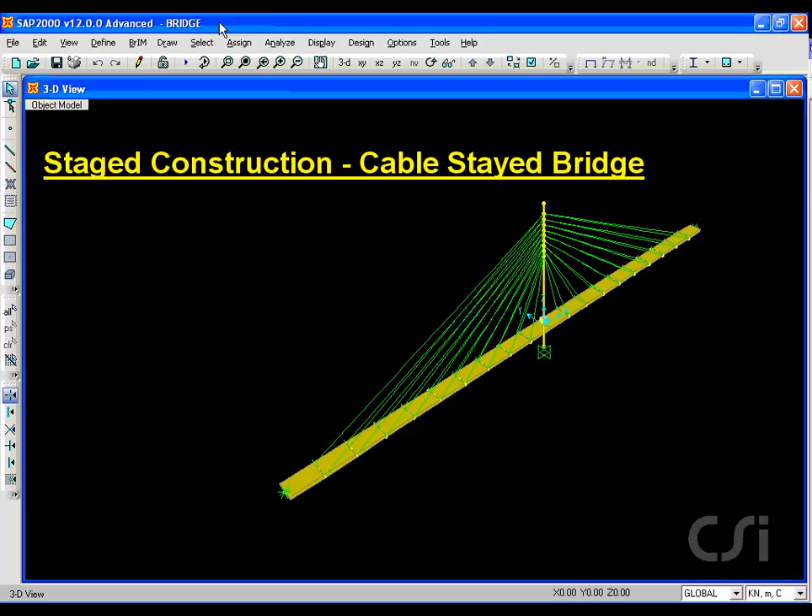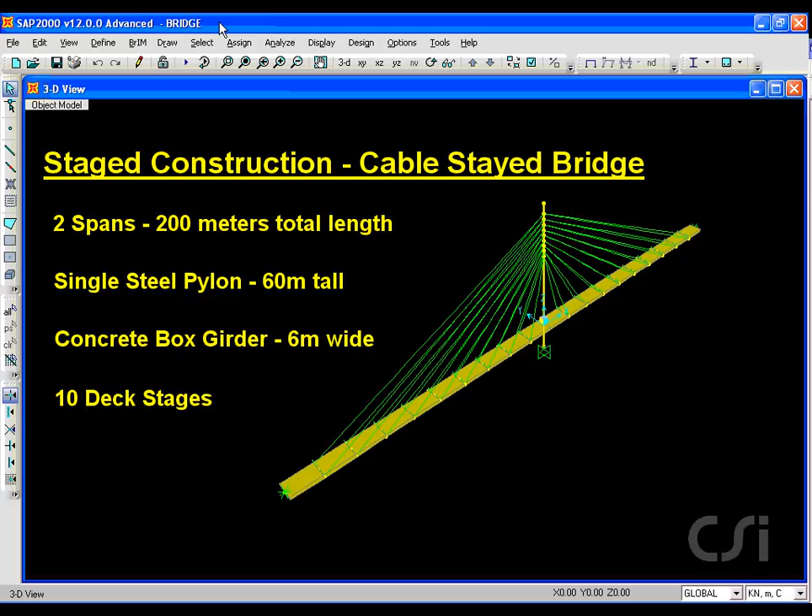This tutorial will show how to use SAP 2000 to model staged construction of a cable-stayed bridge using the Construction Scheduler feature. It will have two spans, each 100 meters in length, with a single steel pylon 60 meters tall. The deck will be a concrete box section, 6 meters wide, and will be constructed in 10 stages.

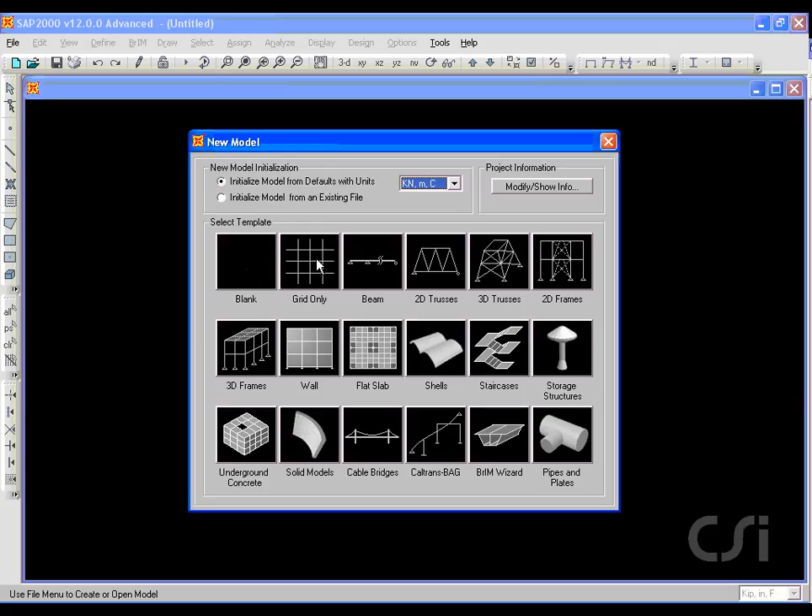We start the process by clicking on File, New Model, and selecting the units as kilonewton meters. We will construct the model using only grids, so click on the Grid Only button. We will have a total of 3 grid lines in each direction.

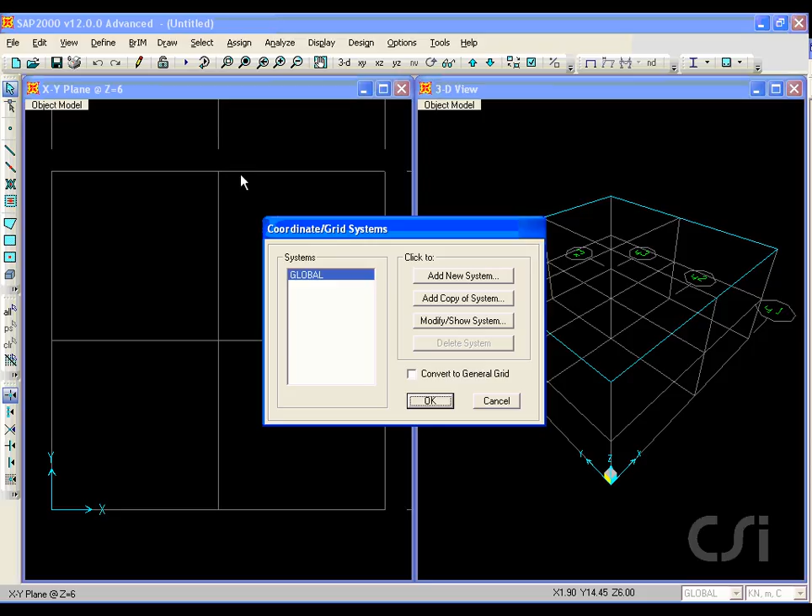Click on the Define Coordinate Systems Grids command, and then the Modify Show button to bring up the Define Grid System data form. For the X direction, which is along the span, our coordinates will be -100, 0, and +100. In the Y direction, which is across the deck width, we will enter -3, 3, and 0. In the Z direction, which is vertical, we enter -10, 0, and 50.

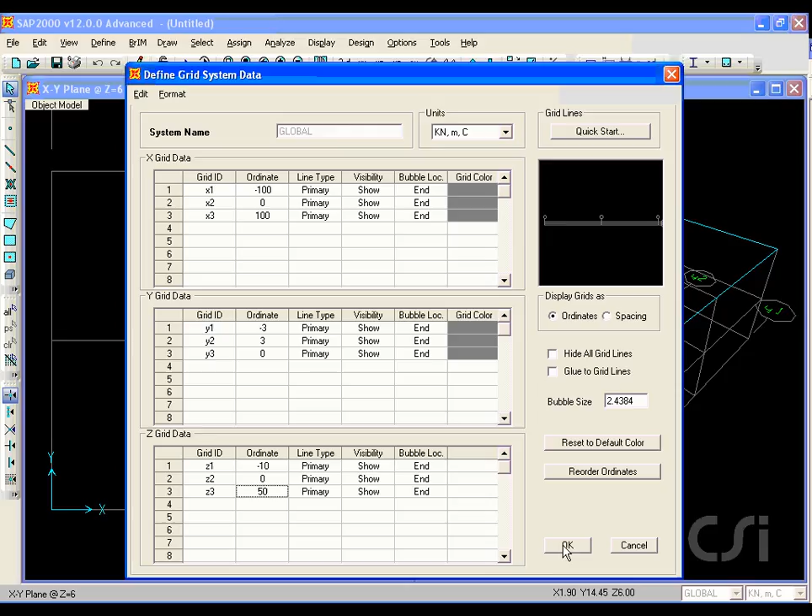We will work in only one window, so close the Plan window and then go to the Define Section Properties Frame Sections command. Here we will add pipe sections to define a non-prismatic pylon. Make sure that the frame section property type is set to steel and click the Pipe button. We start with the bottom section and enter 1.2 meters for the diameter and 0.05 for the thickness.

We will add another pipe section to model the pylon at the top. Here it has a diameter of 0.6 meters and then again a thickness of 0.05.

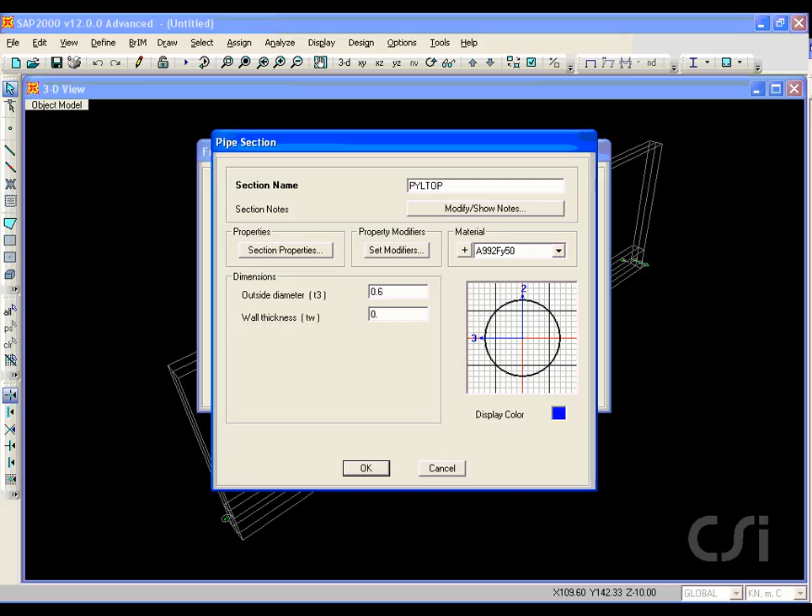Next, we take the previously defined sections and create a non-prismatic section. Select Other from the frame section property type and click the non-prismatic button. We will call it Pylon and use the top section as the start section and the bottom section as the end. It will be varied over the entire length in a cubic variation.

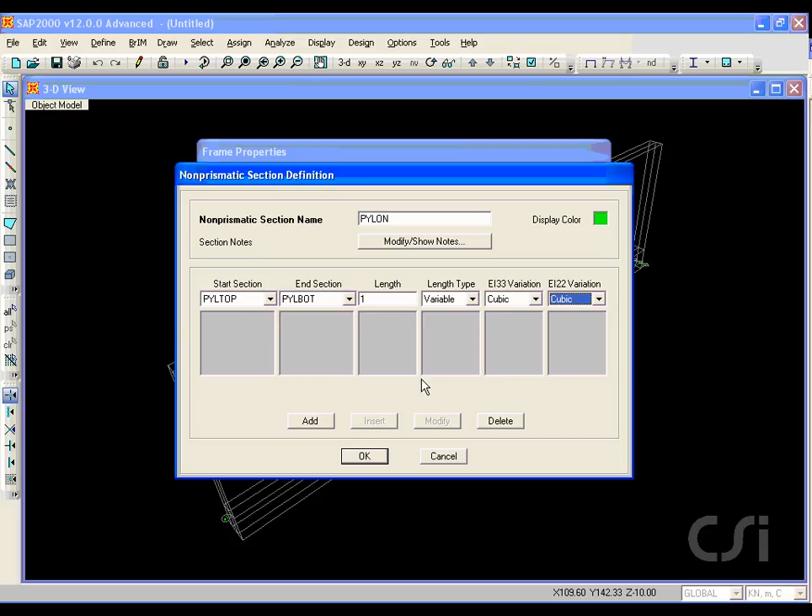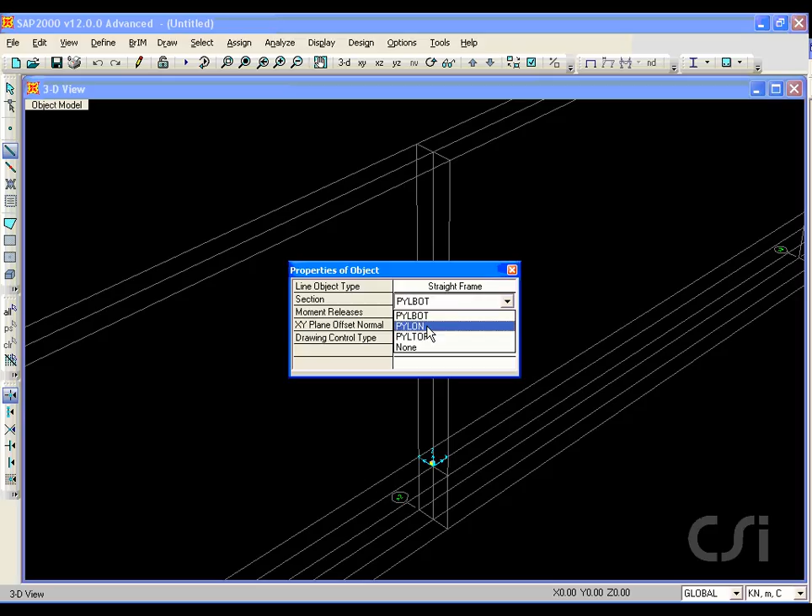Next, we zoom in on the pylon location and draw the pylon object, starting at the top and going to the bottom to match our member definition. We leave the Draw mode and shut off the grids under the View menu.

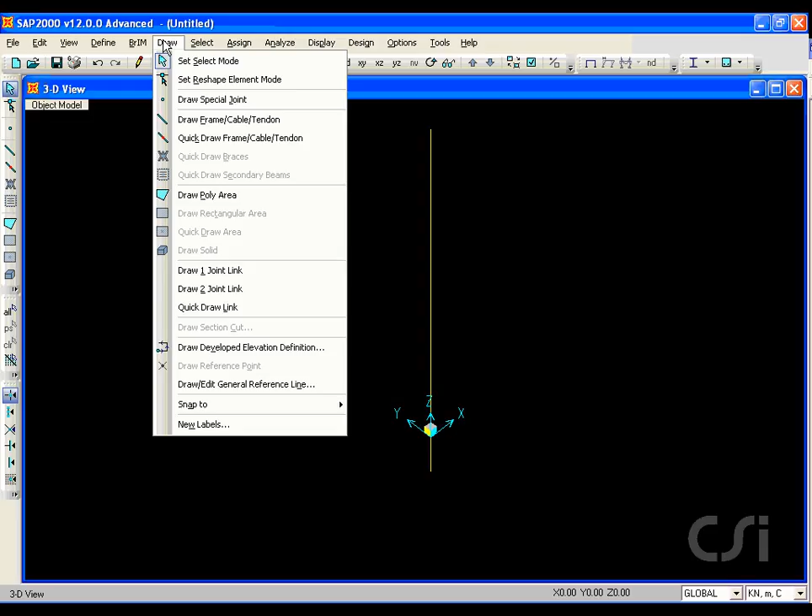Next, we will draw joints to model the saddle locations for the cables. The first joint will be 4 meters below the top of the pylon. By clicking on the top of the pylon with the offset set to -4 meters, a joint is added.

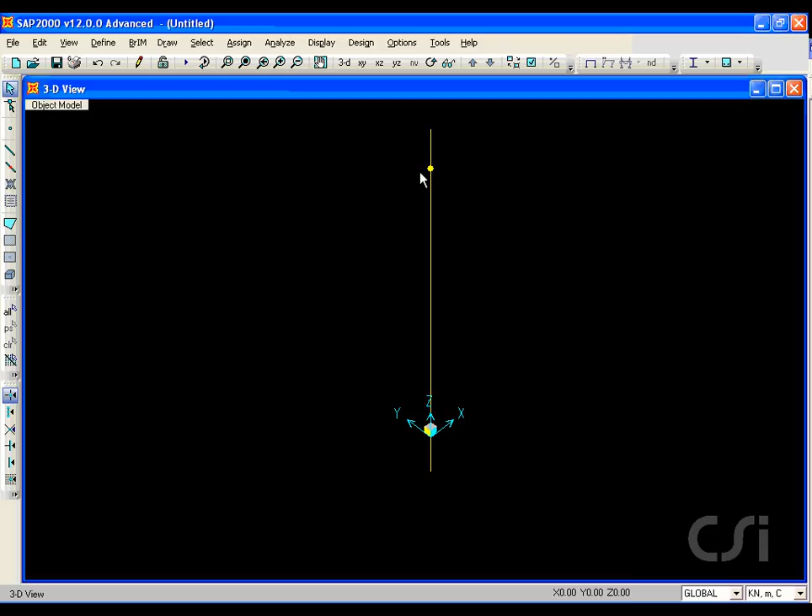We leave the Draw menu, select the joint just drawn, and go to the Edit Replicate command. Here, we will add additional joints for the saddles at 2-meter intervals below the selected joint. This gives us a total of 9 cable to pylon connections.

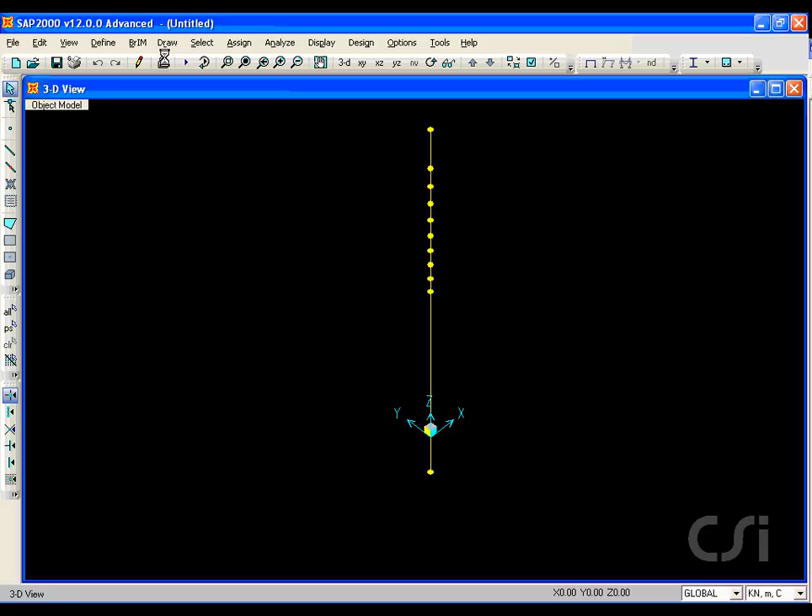Next, we will modify the concrete material property to include time-dependent properties. Make sure that 4000 psi is selected, which is our concrete material, and click the Modify Show button. Check the Switch to Advanced Property display box, and then the Modify Show Material Properties button. Lastly, click the Time-Dependent Properties button.

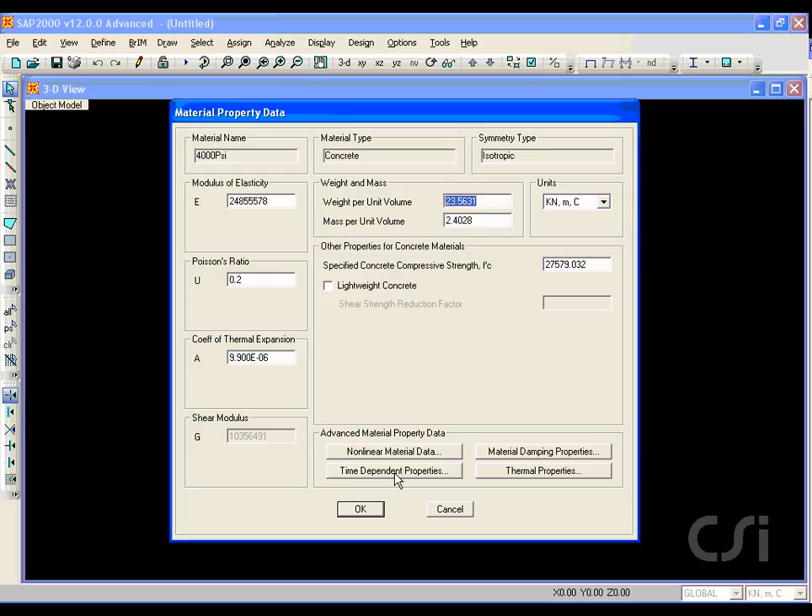In this model, we will include both creep and shrinkage effects. We will set the shrinkage start age to be 3 days, and we'll use the full integration creep analysis type.

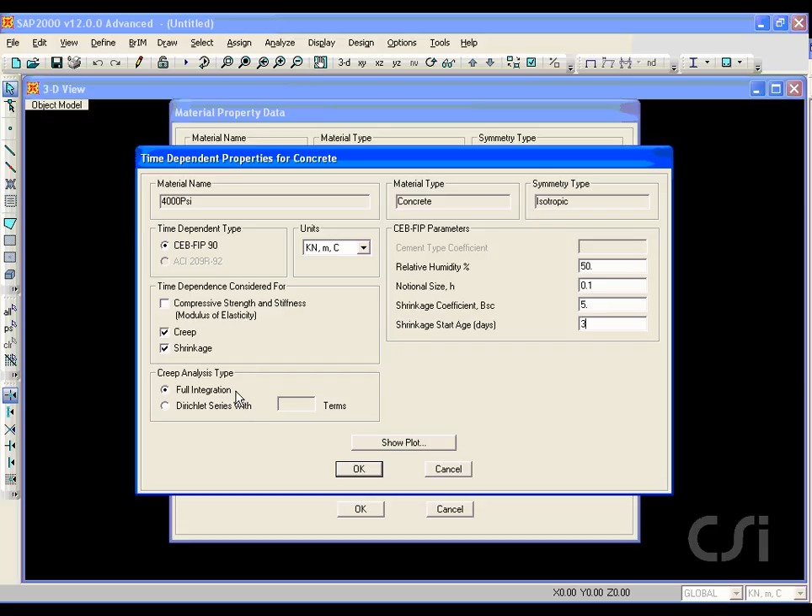Next, we will define the concrete box girder to be used for the deck. Select the material to be concrete and click on the Tube button. Input a depth of 1.2 meters, a width of 6 meters, a flange thickness of 0.2, and a web thickness of 0.3.

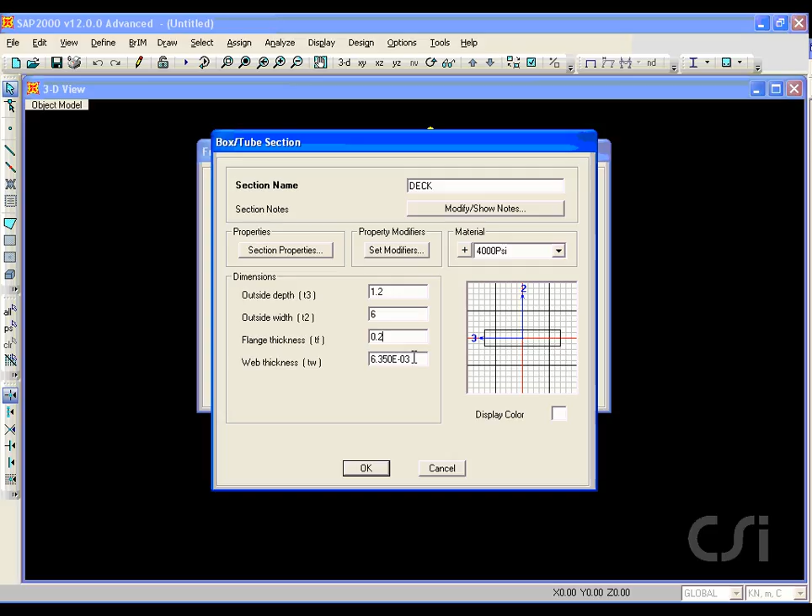Toggle the grids back on and switch to an XY plan view, and toggle down to the Z equals 0 level, which is the elevation of the deck. We will draw the deck as a single object from the pylon out to the right end.

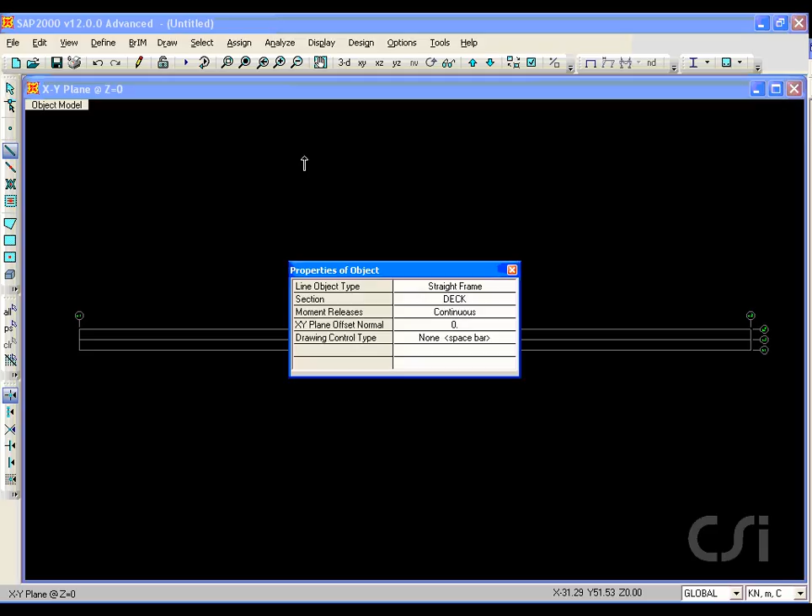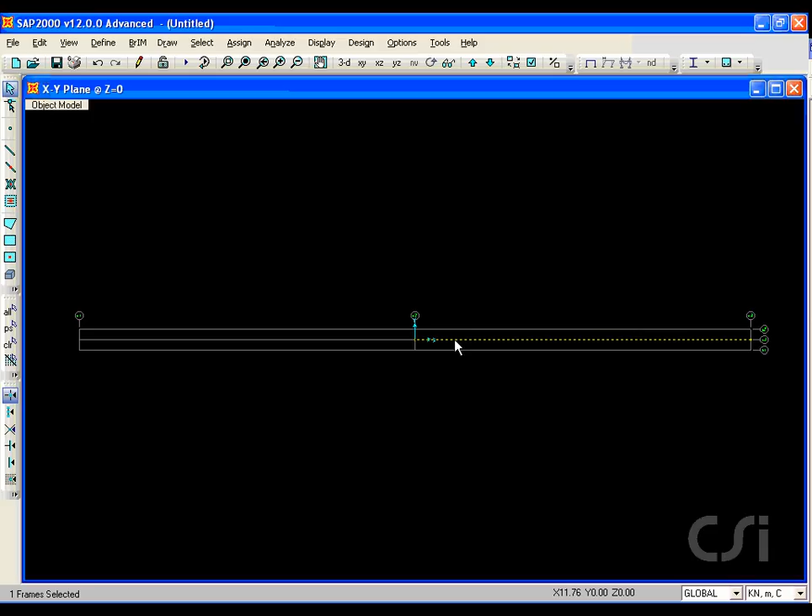Click on the Select Mode button and select the frame object just drawn. Go to the Edit, Edit Lines, Divide Frames command and enter 10 to divide the deck into 10 segments.

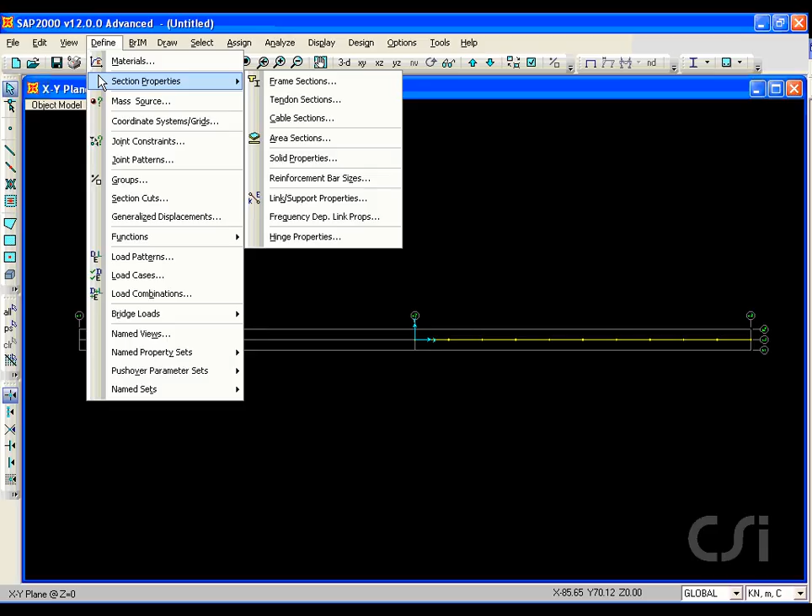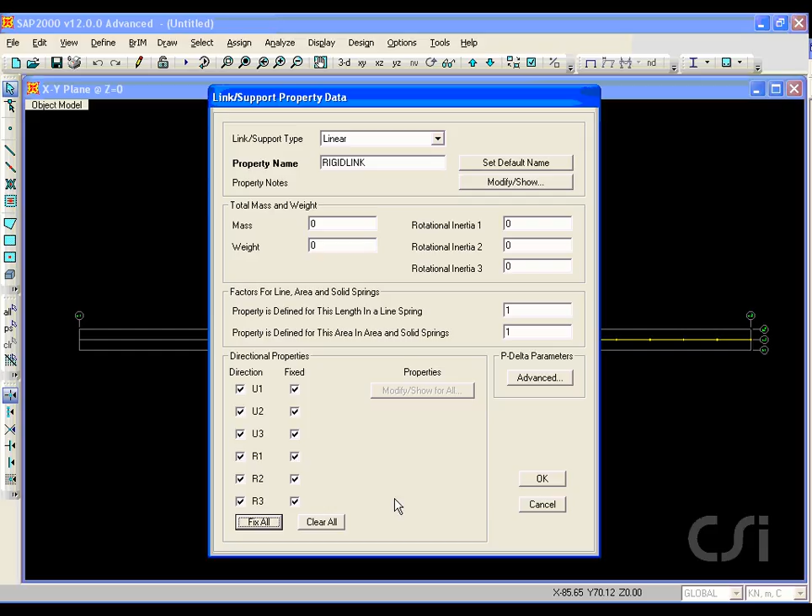Next, we will define rigid links that span from the deck centerline to the deck edge where the cables connect. Click on the Fix All button to restrict any relative deformation. Before we draw the links, we will turn on the Snap to Lines option, and we'll window in for a better view.

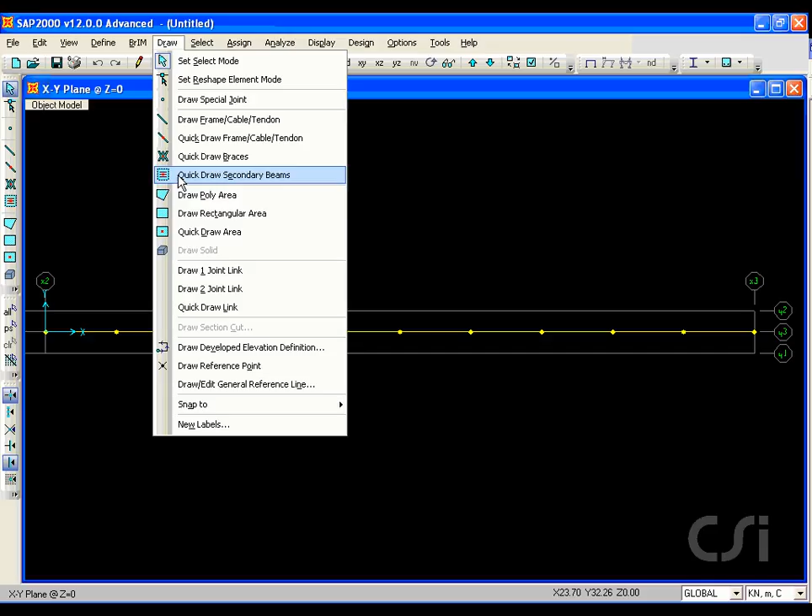Click on the Draw 2 Joint Link command, and make sure that rigid link is showing in the property box. Click on the first joint to the right of the origin, select Vertical from the Drawing Control box, and click on the top grid line to draw one link. Right-click the mouse to stop drawing, and repeat the process for the rigid link on the other side of the deck.

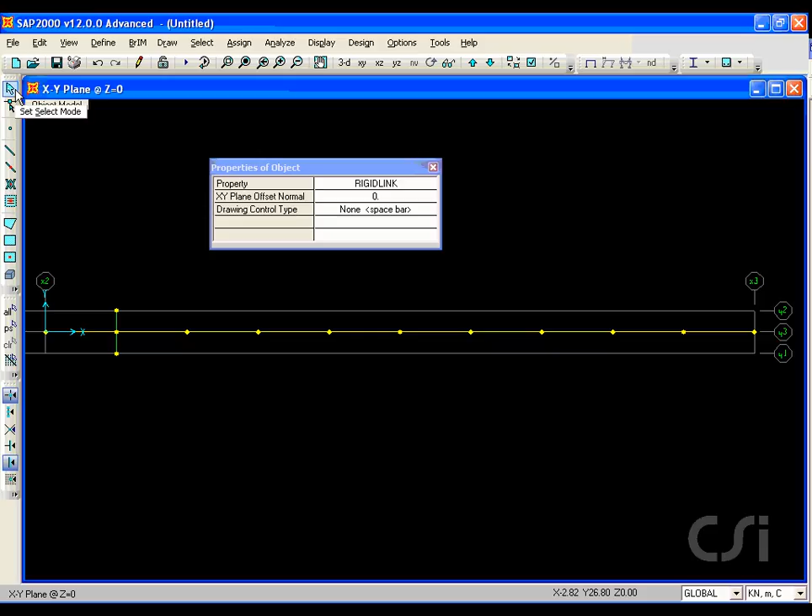Zoom in even closer and select the two rigid links just drawn and go to the Edit Replicate command, and add links at 10 meters on center.

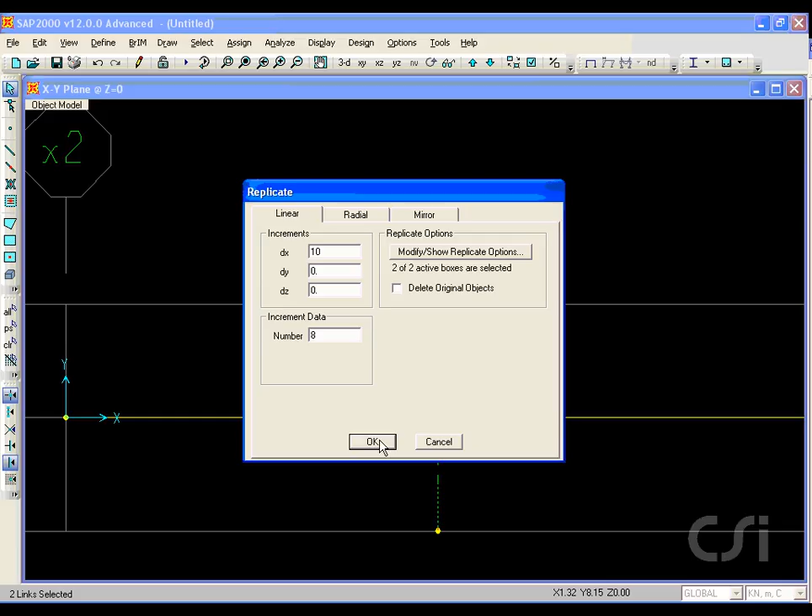Isolating our view on the right side of the bridge. Next, we will define the cable sections. Go to Define Cable Sections and add a new section. We will define the properties by using a diameter of 0.04 meters.

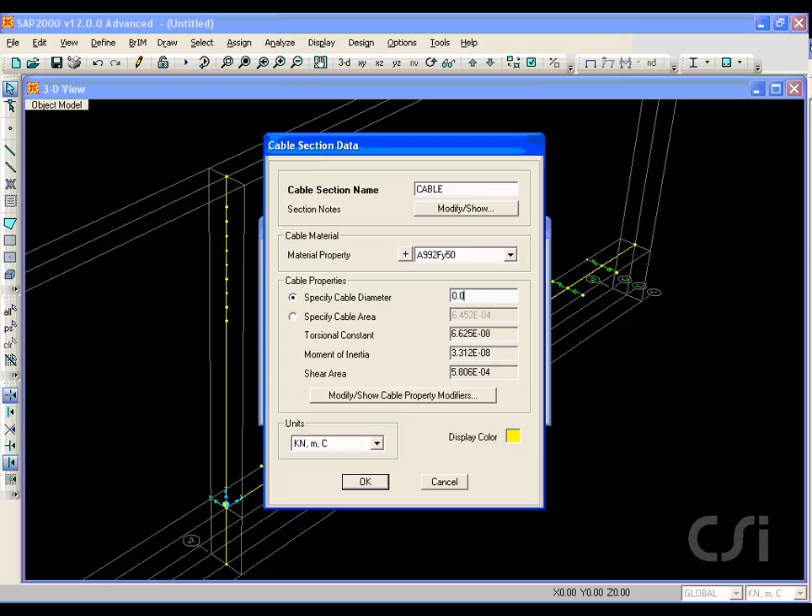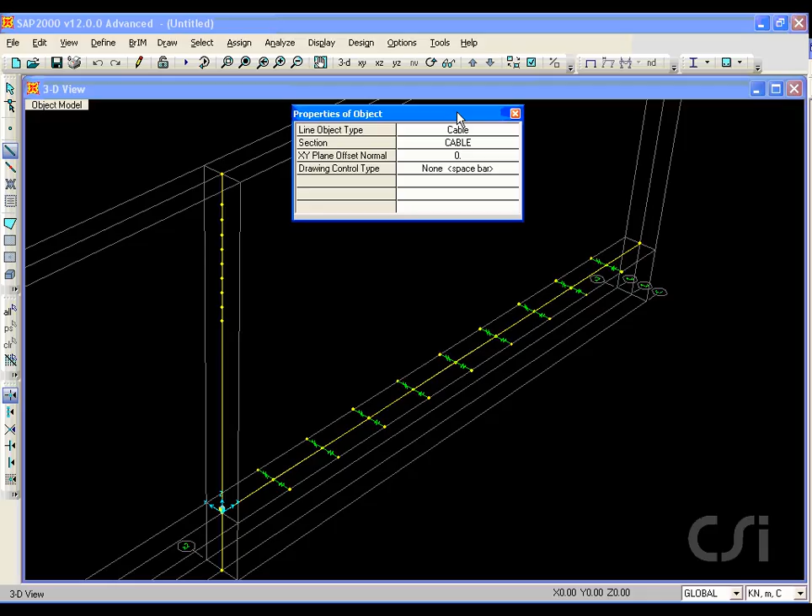Next, we will draw the cable objects. Make sure that the line object type and section are set to cable. Draw the cable from the lowest saddle point to the end of the first bridge segment. The cable geometry form automatically opens.

Verify that the number of segments is set to 1, which is typically all we need due to the fact that catenary effects are automatically included in the cable, and make sure that the cable type is set to undeformed as we want the cables to be taut.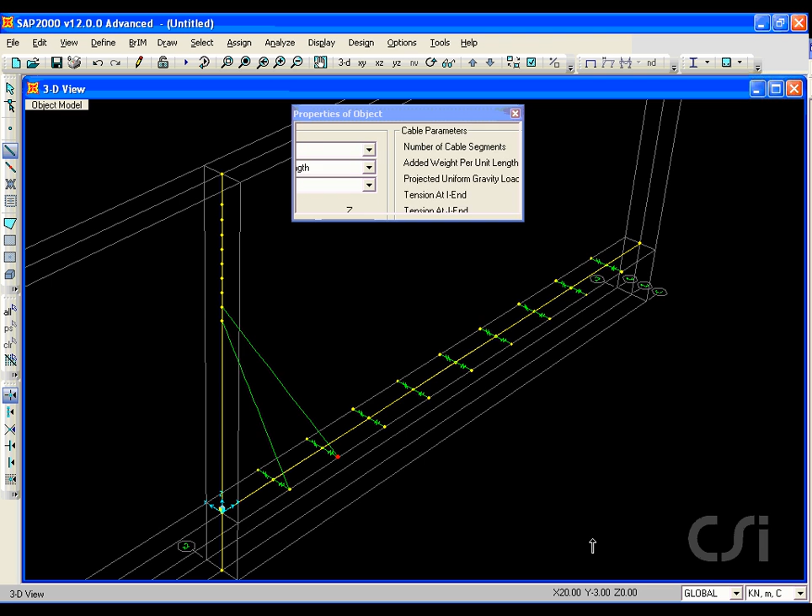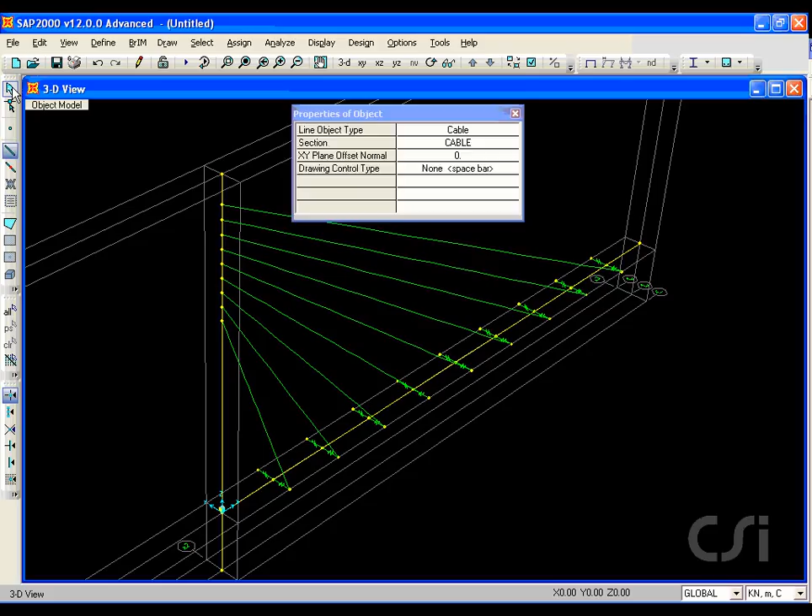Repeat the process for the next cable, going up one saddle point and out one bridge segment. Continue this drawing until cables have been added all the way out. Select all the cables using the Select Properties Cable Properties command. And go to the Edit Replicate command.

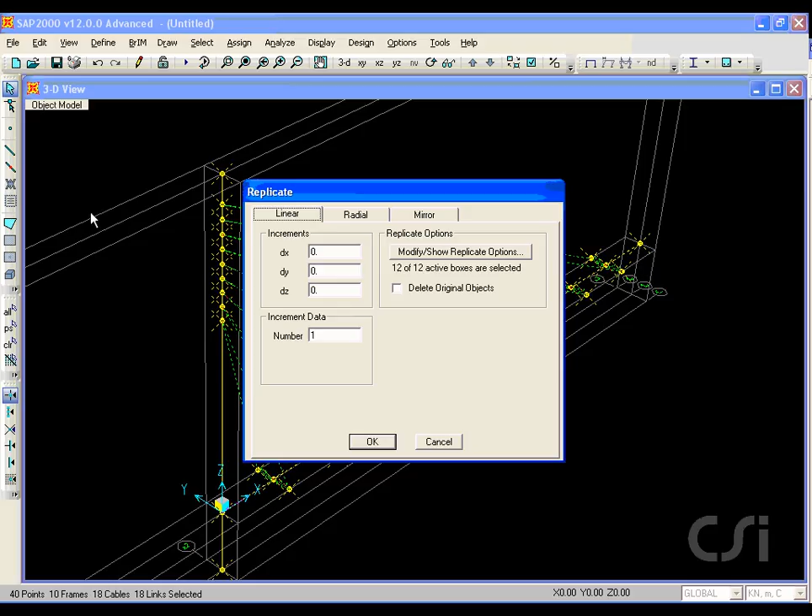We will use the Mirror tab and mirror the cables about the plane parallel to X to create cables on the other side of the deck. Now select the entire model and click on the pylon to unselect it. Again, click on the Edit Replicate command and then the Mirror tab. But this time, click on the mirror about plane parallel to Y. This will replicate the cables and deck on the left side span.

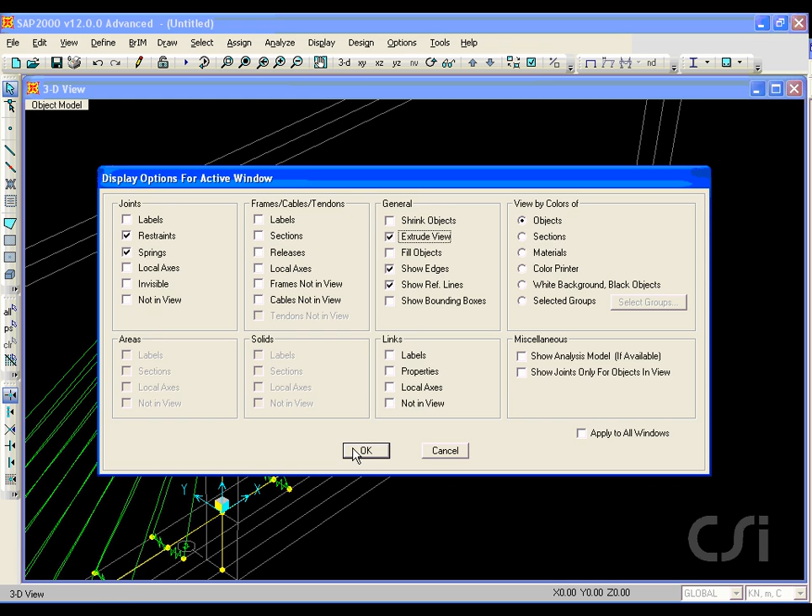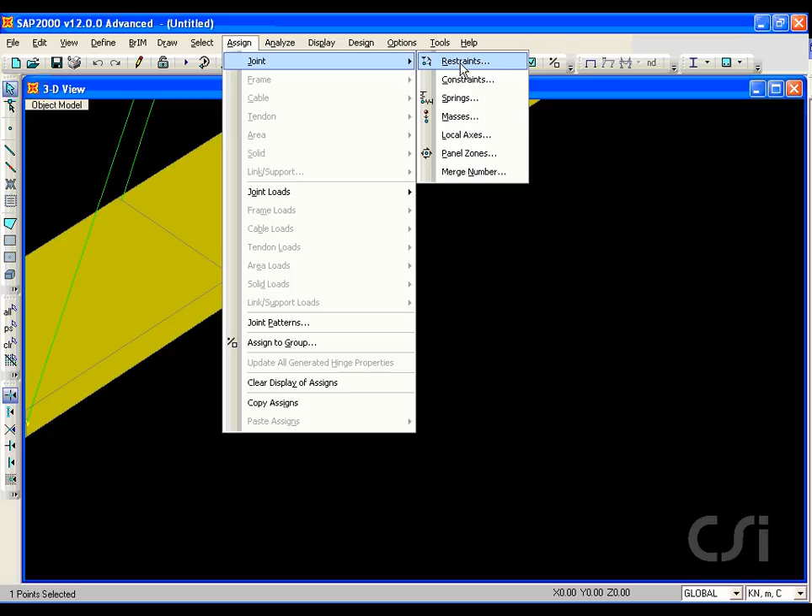To enhance the view, we will select the Extrude View option. And we will also turn off the grid lines and display the model in full 3D. Next, zoom into the base of the pylon so that we may assign support restraints. For the pylon, we will fix the base to restrict all translation and rotation.

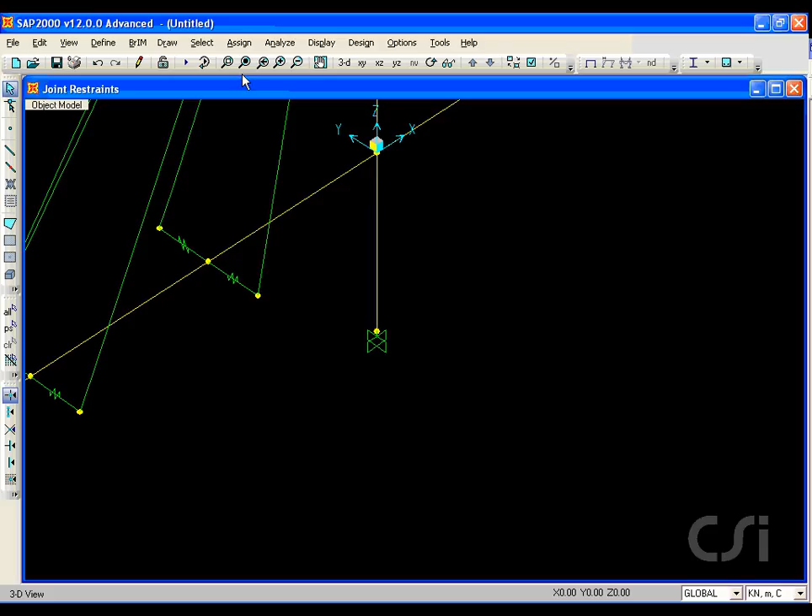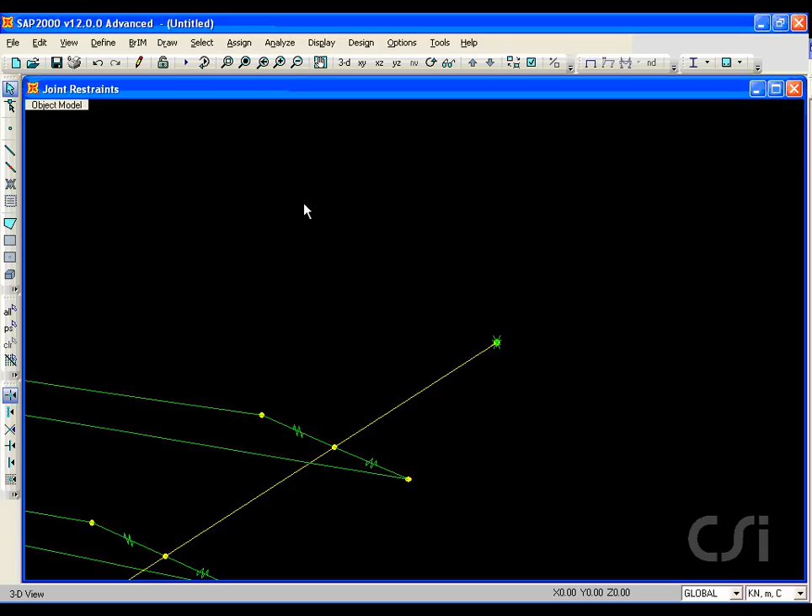We will turn off the extruded view so that it will be easier to select objects. Next, we will select the right end of the bridge and assign a roller support. We will assign the same roller support to the left end as well.

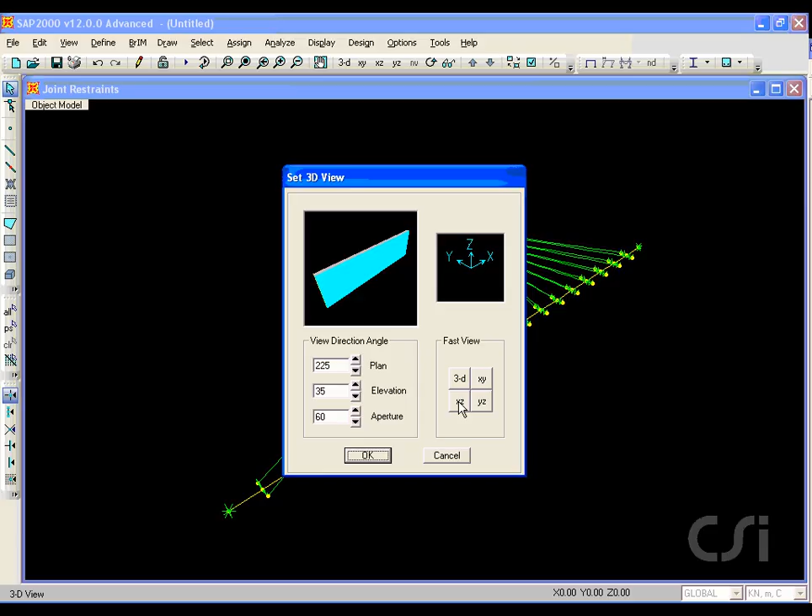Next, we will assign objects to groups that will be needed to define the stage construction. Start by switching the view to an XZ plane and selecting the pylon. Go to the Assign to Group command and add a new group called Pylon.

Next, select the deck segments just to the right and left sides of the pylon, along with the accompanying cables. There will be 4 cables in all, and assign them to a group called Deck 1. This will be the first deck construction stage.

Repeat this procedure for the next group of decks and cables. And continue until all deck sections have been assigned to a group, finishing up with group Deck 10 that consists of just deck.

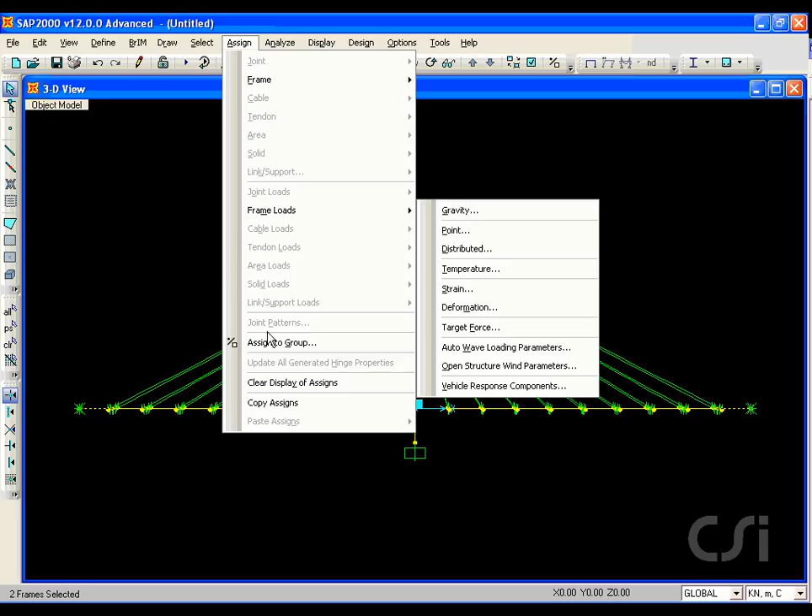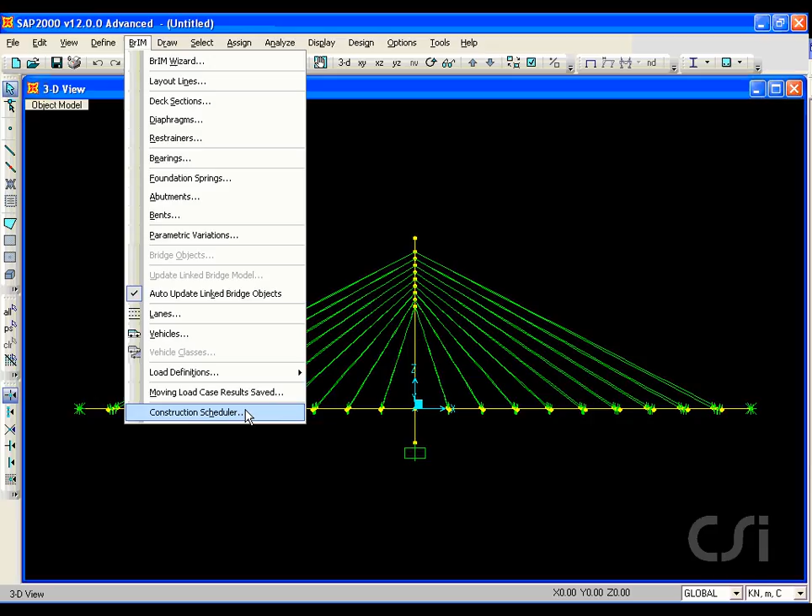The next step is to define the sequence of construction, which is where we will identify the tasks using the construction scheduler found under the BrIM menu. Items input here will be converted into stages and cases under the load cases command. Stages may involve changes in the structure, application of load, and/or elapsed time during which creep, shrinkage, and material aging may occur. First, the model is saved.

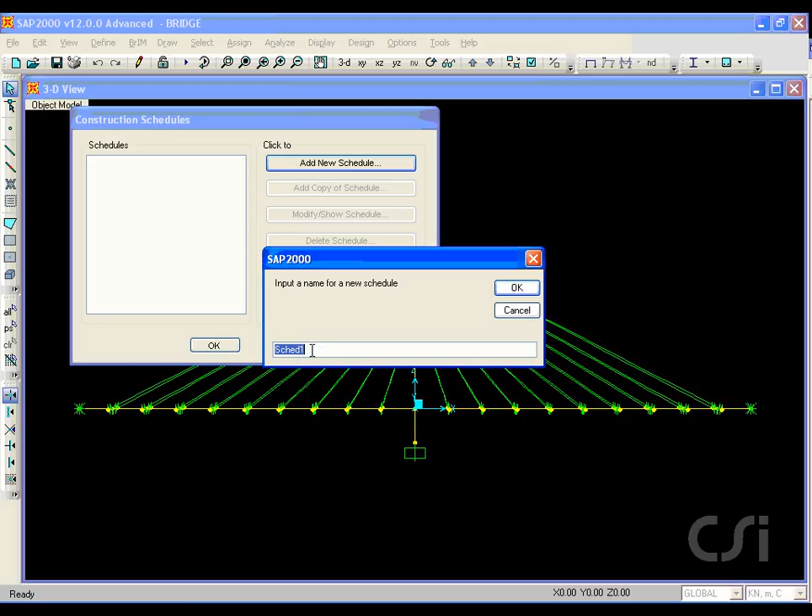Next, click the Add New Schedule button and click OK for the default schedule name. We start by entering Superstructure as our first task description. This will be a summary task that will be used to group all the tasks associated with building the superstructure. The next task will be Pylon with a duration of 7 days. It has no predecessor task,

and we click the Define Operations toolbar button to display the operations form. Select Add Structure for the operation, select Pylon for the group, and use 0 days for the age at add since the material is steel. In addition to the structure being added, check the Include Object Self-Weight checkbox and load this group with a load equal to twice the dead load.

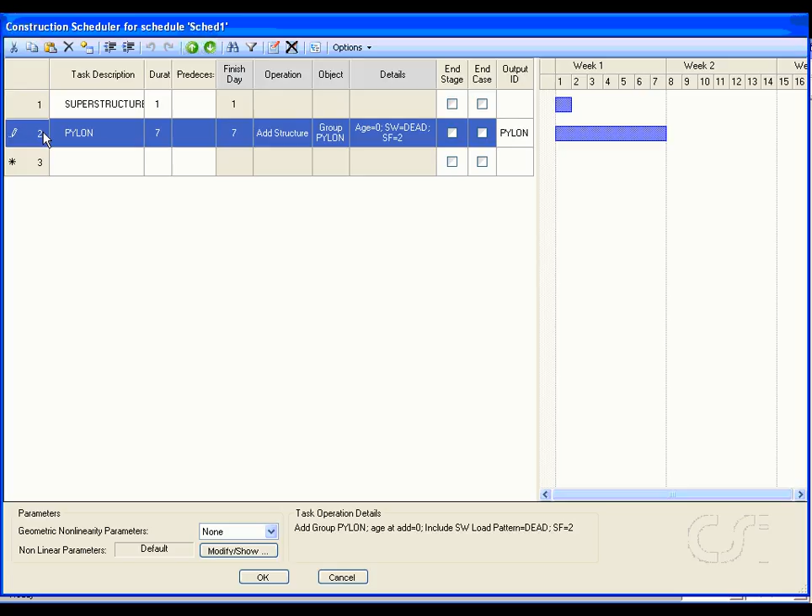On the schedule, notice that the columns have been populated with the operation, object, and details including age, self-weight, and scale factor. Lastly, for this task, we will specify an output ID, also called Pylon. Select this task and click the Increase Indent toolbar button to identify this task as a subtask of superstructure.

Now we will add another task, this time for the first deck stage. Named Deck 1, it will have a duration of 3 days and will have a predecessor of Task 2, which means that it will not start until the completion of Task 2. This conditional relationship will be shown on the Gantt chart. Double-click on the Operations cell to bring up the operations form, and again we add structure, this time the group Deck 1,

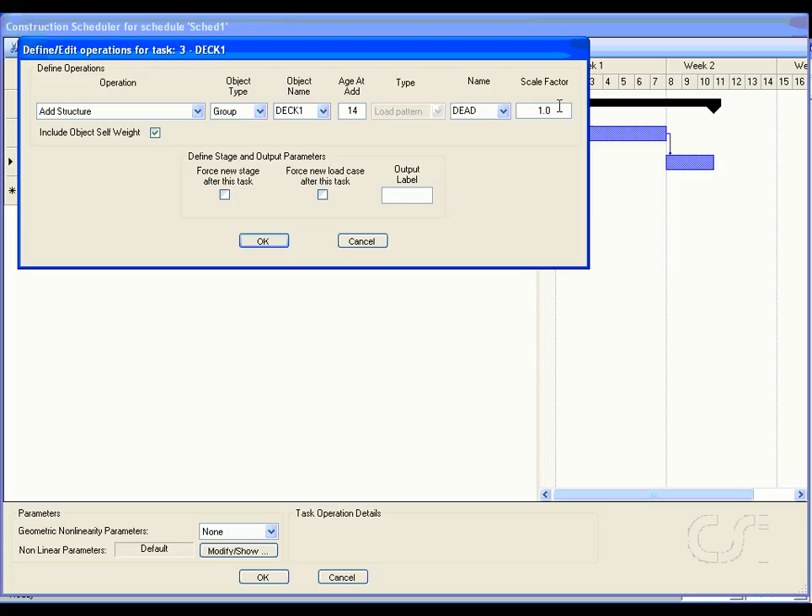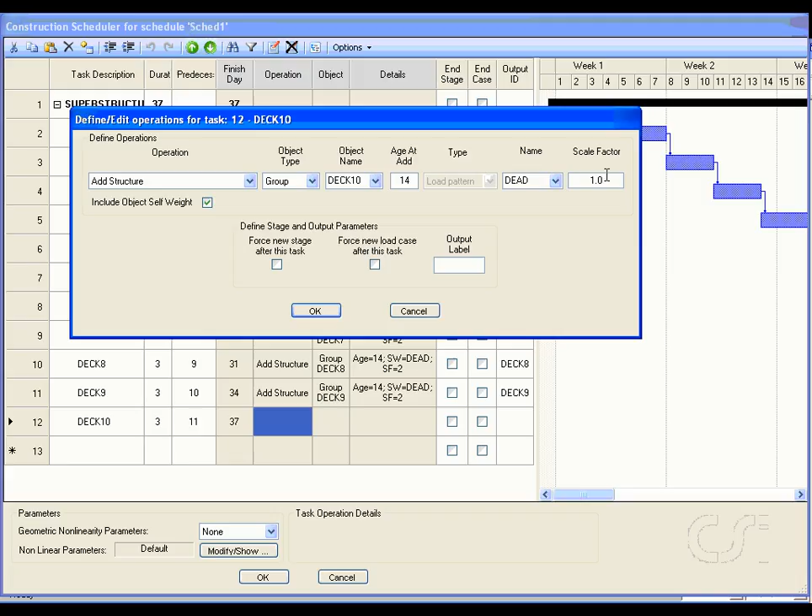with an age at add of 14 days. Self-weight is checked with a dead load scale factor of 2. We specify Deck 1 for the output ID. Repeat this process until you have created tasks for all of the deck groups. Scrolling out, we can see how the tasks relate to one another on the Gantt chart.

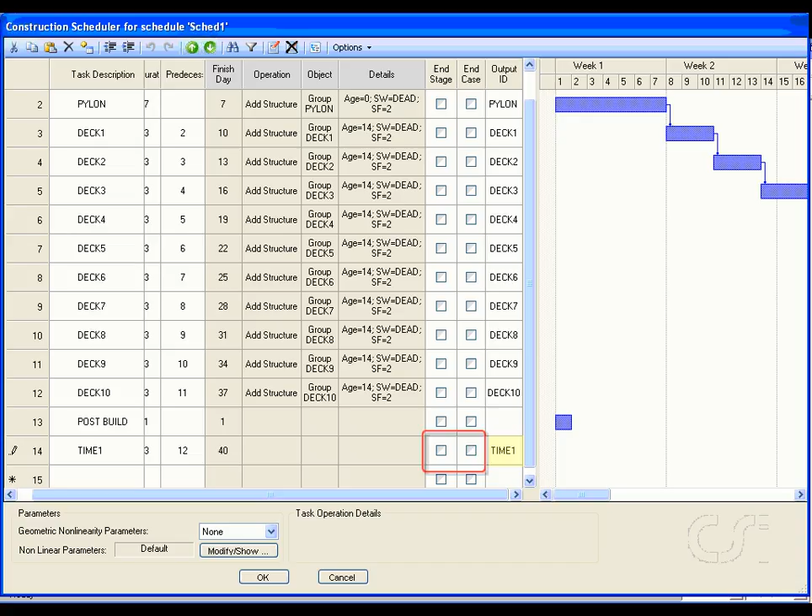Next, we will add tasks after the construction to model the effects of time. We will input a task summary called post-build, and then a task called time 1 with a duration of 3 days, a predecessor of task 12, but no operations. This task is only meant to mark the passage of time. No structure is added or loaded. However, it is important to specify an output ID, for if the task contains no operations and the end stage and end case checkboxes are not marked, the program will ignore the task unless the output ID is specified.

Continue to add time tasks, with the last task having a duration of 3,000 days. Older concrete is less sensitive to time and thus may have a longer duration step. It is important to realize that task duration can have a significant impact on creep calculations. Select the post-build task and click on the Decrease Indent button to identify this task as a summary task. Again, we can see the relationship between tasks, including summary tasks and subtasks.

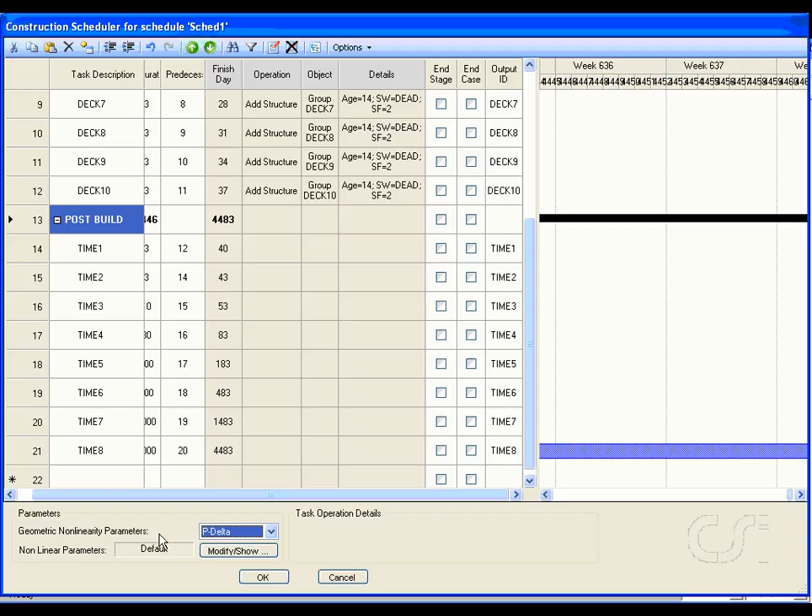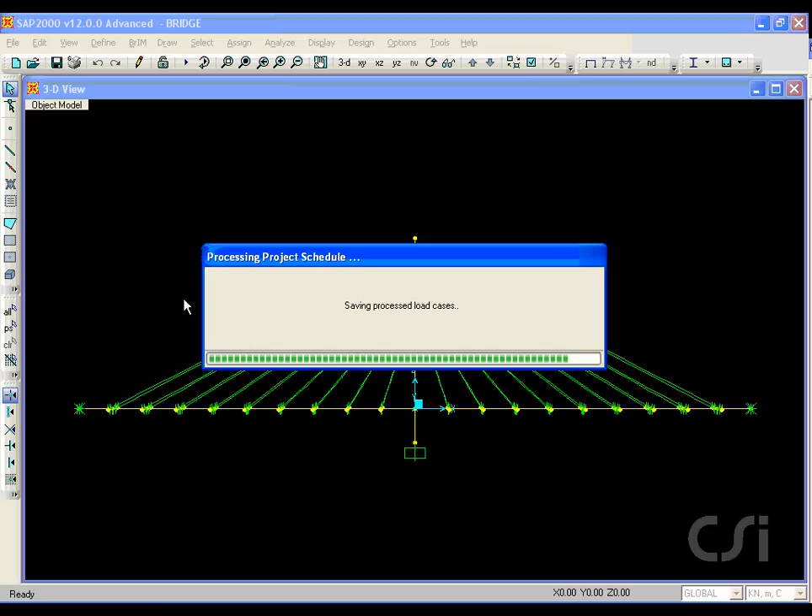Before we leave the construction scheduler, select P-delta from the Geometric Nonlinearity Parameters drop-down list to include P-delta effects in the pylon and deck, and click the Modify/Show button for nonlinear parameters. Make sure that the Time-Dependent Material Properties option is checked, so that creep and shrinkage effects are included for the concrete material. We are now ready to leave the construction scheduler. As we exit, the scheduler generates the stages and load cases for the nonlinear static analysis.

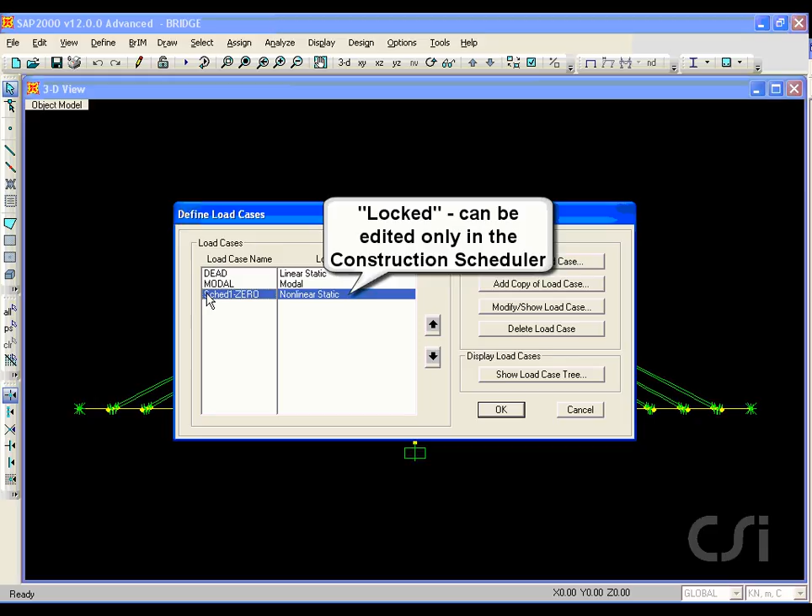Click the Define Load Cases command, and we see that a Sched1-ZERO load case has been created from the construction scheduler input. This load case is locked, meaning that no changes may be made to it using the Modify Load Case button. Changes can only be made in the scheduler. On occasion, however, we may want to make some changes directly to the load case, in which case we first need to make a copy and then edit the copy.

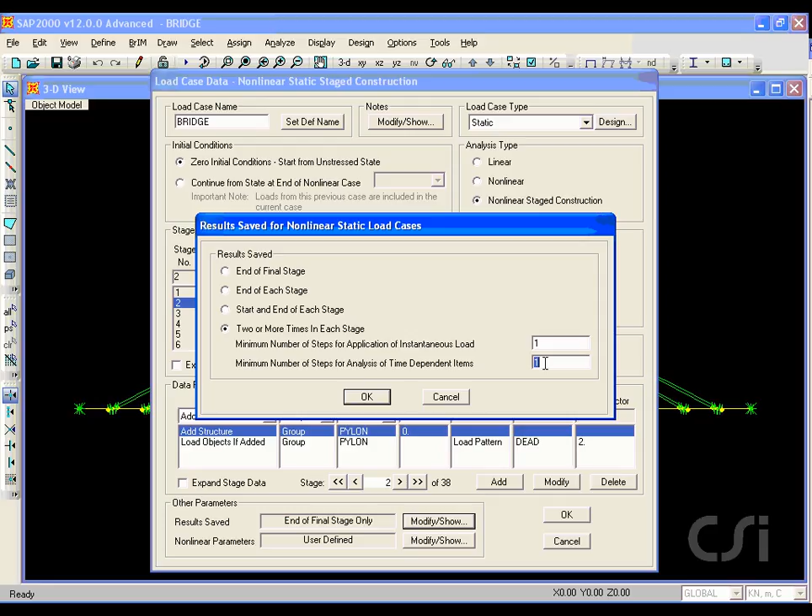Name our copy case Bridge, and note that the stage construction load cases are a type of nonlinear static analysis. Also note that P-delta has been selected as done on the scheduler. The construction scheduler typically creates 2 stages for each task, a duration stage with no operations and a 0 duration task at the finish day where operations are carried out. Click on the Modify/Show button for results saved, and make sure that there are an adequate number of steps assigned for the time-dependent items. We will use 5 for this model.

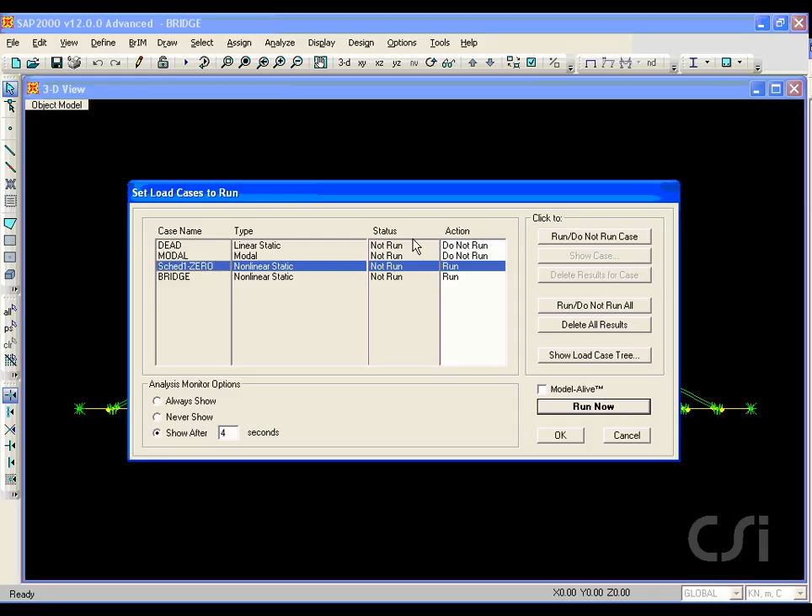Now we are ready to run the analysis. For this model, we will not run the dead, modal, or Sched 1 cases, only the copied Bridge case for the static nonlinear stage construction analysis. The analysis window shows how the program steps through each stage.

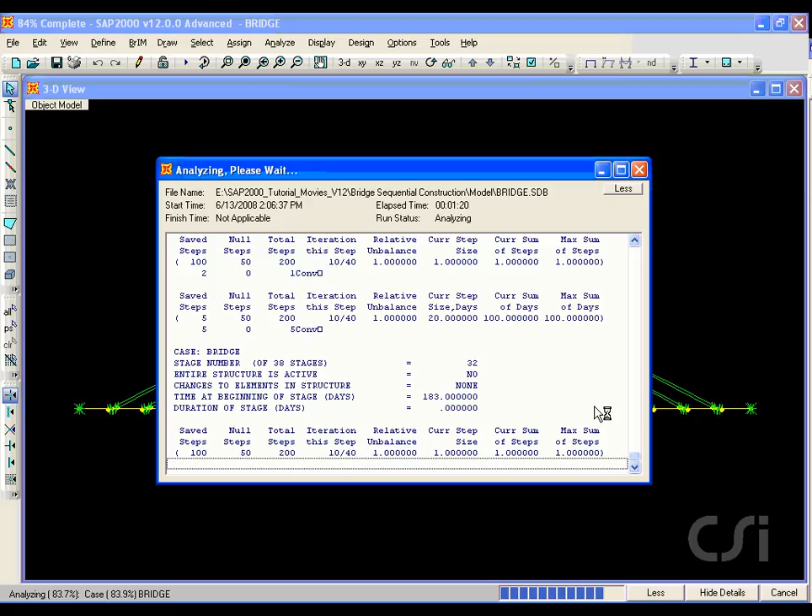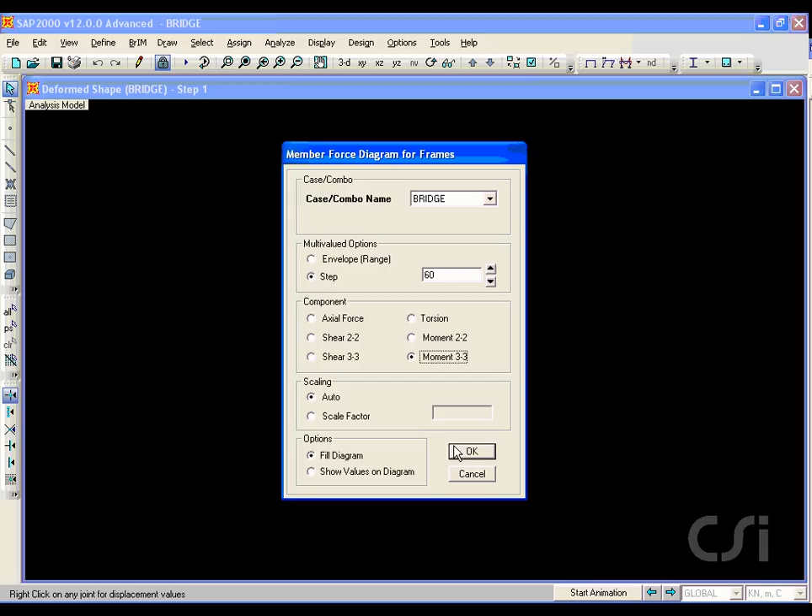Once the analysis is complete, we will display the moment diagram in the deck for a particular step. For the step we selected, step 60, the bridge is only partially complete. We can create a video showing the sequence of bridge construction along with the varying moments in the deck, including both construction and time effects.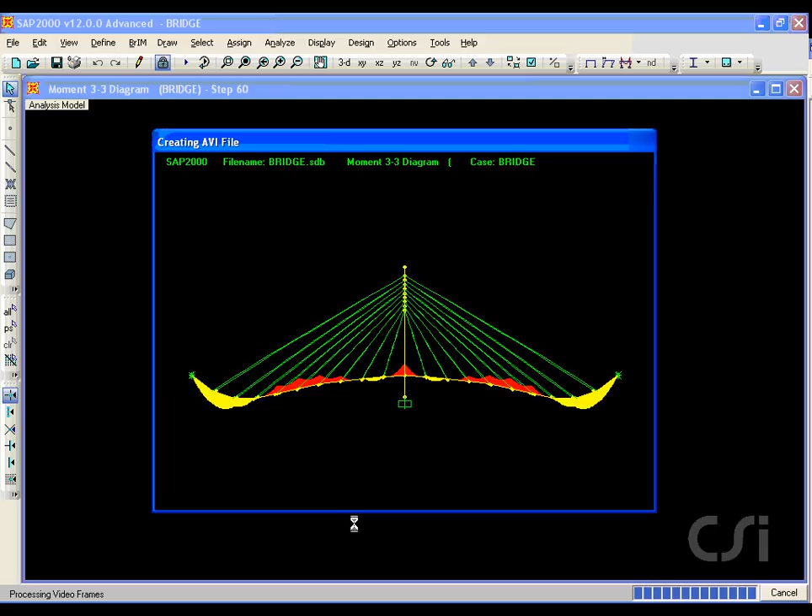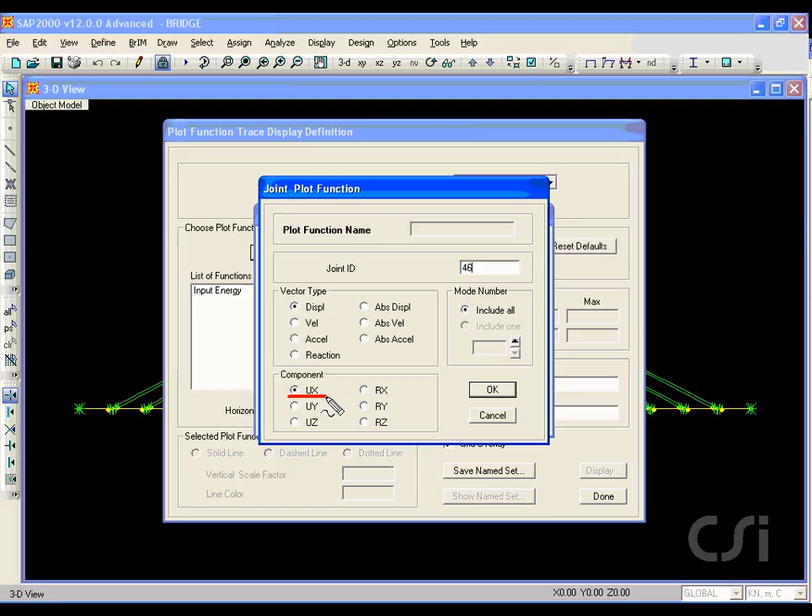Next, display the undeformed shape. Next, we will display the longitudinal deflection of the deck mid-span versus time. The point selected is joint 46. And we will limit the horizontal time axis to 300 days.

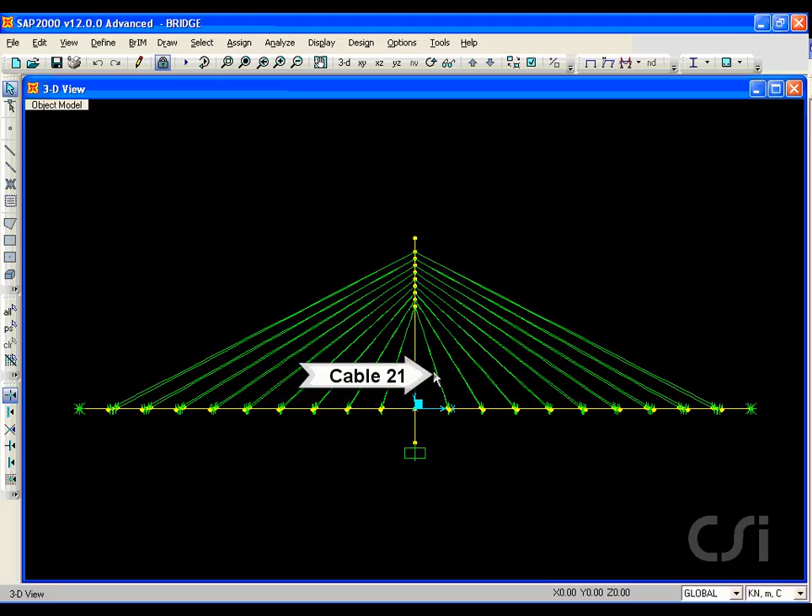Next, we will plot the axial force in 3 cables as it varies with time. This time, we will limit the time axis to 45 days. It is easy to see the 3 distinct starting times for the 3 cables.

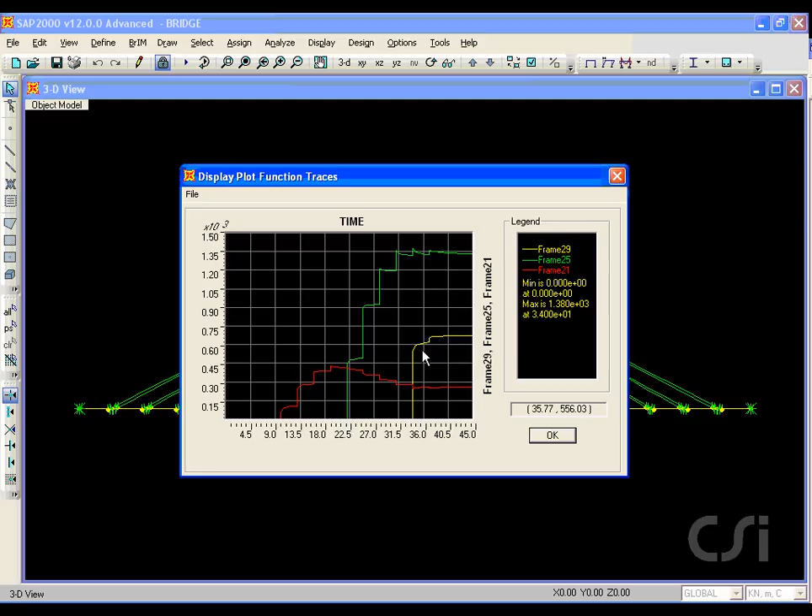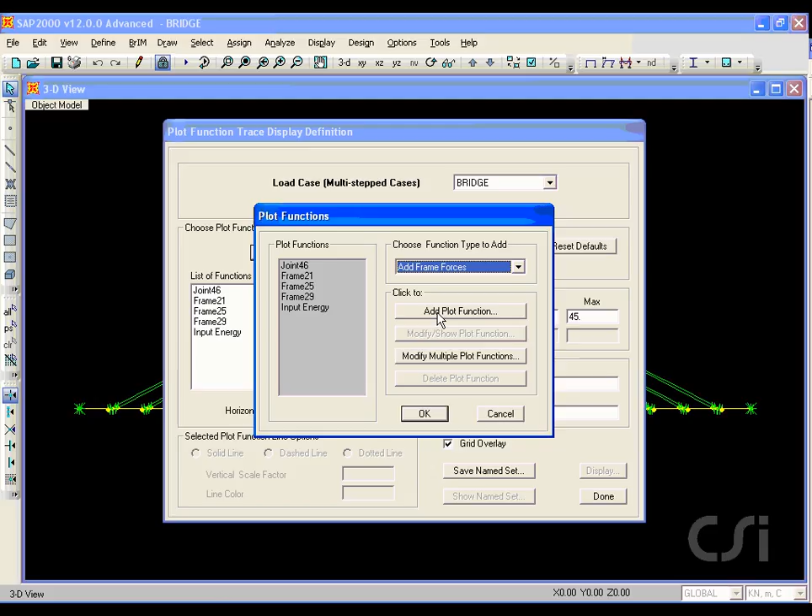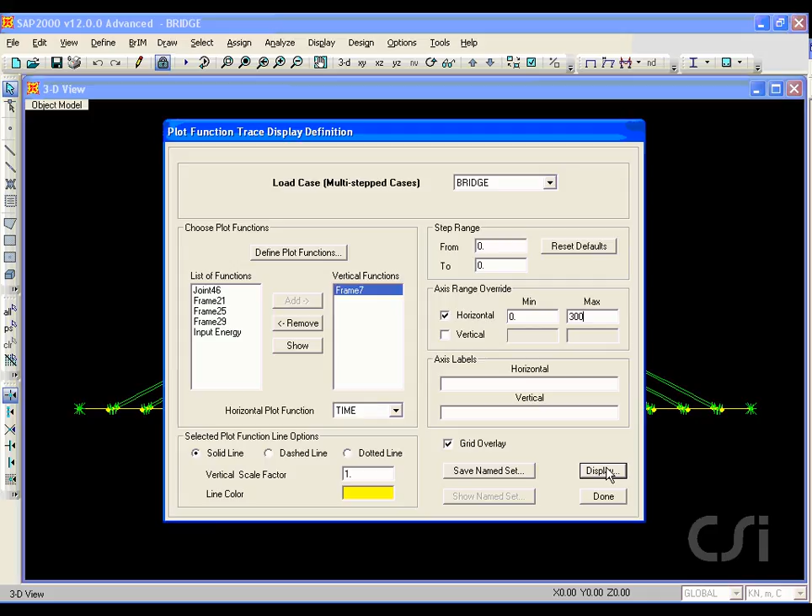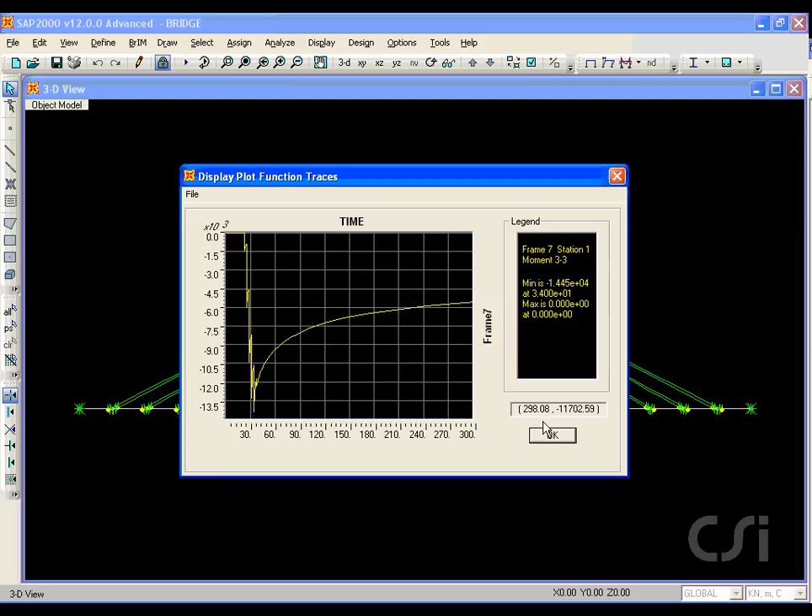Lastly, we will plot the moment mid-span as it varies with time. This concludes this tutorial.